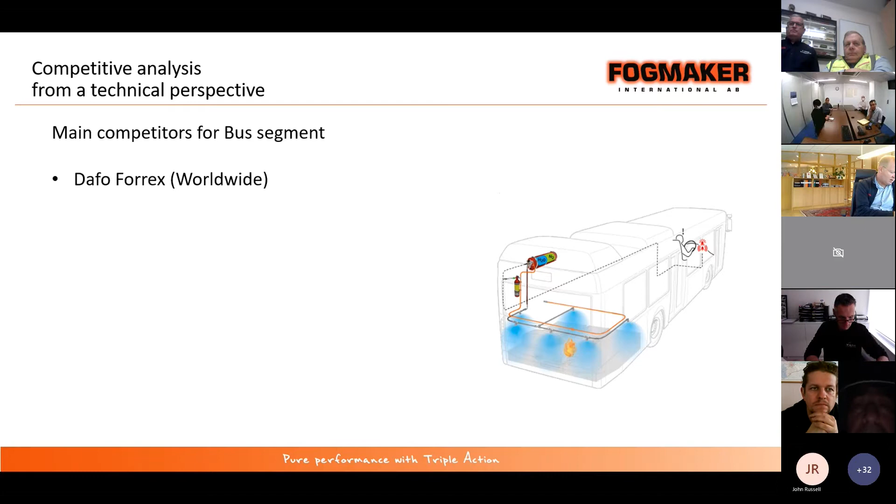In no particular order, Dafo is of course one of our main competitors for buses. They are spread worldwide, more or less. They can pop up basically anywhere. They follow their customers the same as we do, and they've been doing this for a long time, and they have a quite good reseller network as well.

We also have Rotarex, their compact line system. According to their website, there are resellers worldwide except for Africa, and we see them pop up now and then. Quite aggressive prices sometimes.

Third one, Kidde, with their dry chemical powder, mainly in North America, some in Europe as well, but I have not heard from any other parts of the world. Comment here: they are taking part mostly in the Melbourne area, but also in New South Wales in Australia since the banning of PFAS. Good input.

Australia, of course. And we see a lot of newcomers here, I think mainly because of the R107 regulations. We hear that Protecfire, Firedect, and some aerosol suppliers are popping up and are sometimes quite aggressive with low prices.

And we will go through these manufacturers' systems later on.

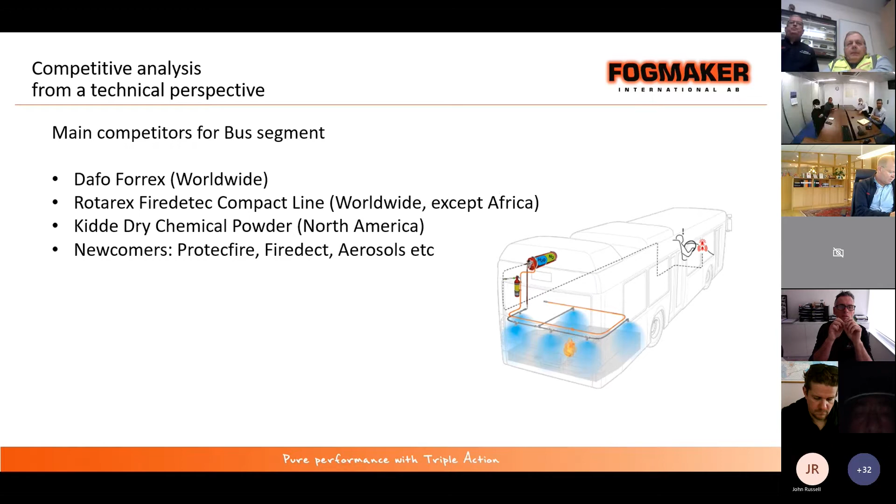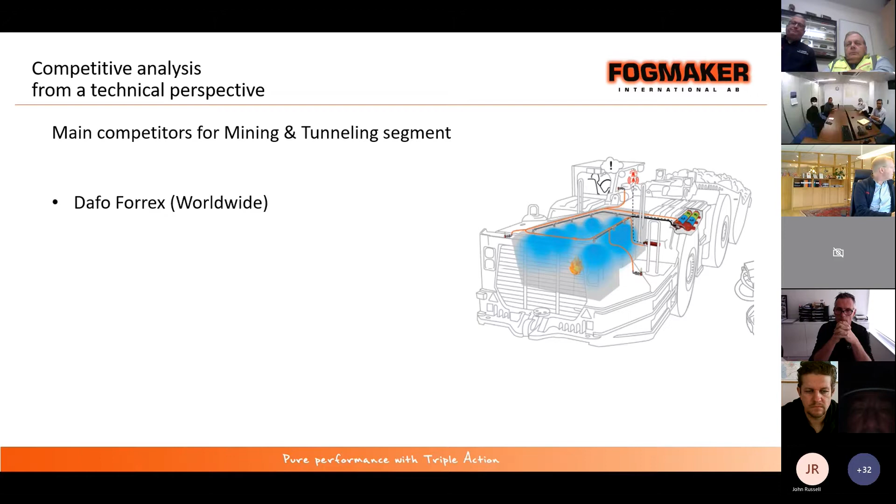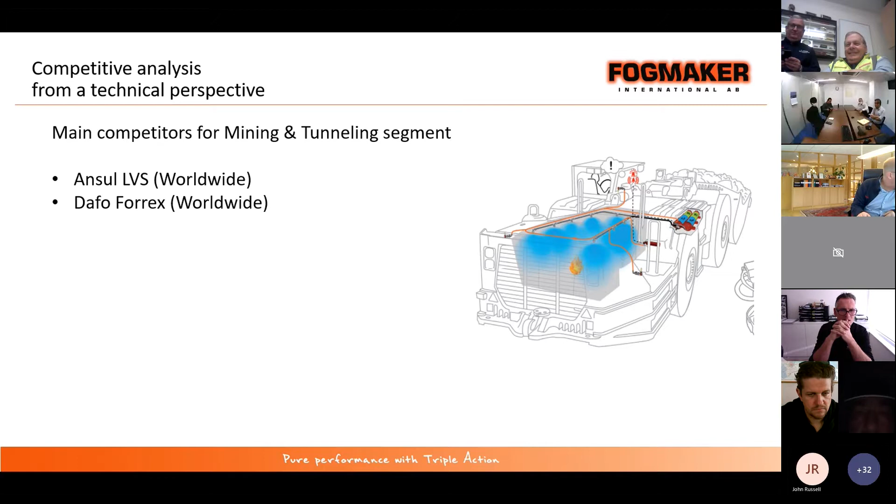And Kidde as well. They have their dry chemical powder, but they also have wet chemical, which might be increasing in the same way as Ansul. We don't know yet. I also put Sandvik on the list. They have their own system, which we bump into now and then. A foam system, liquid system.

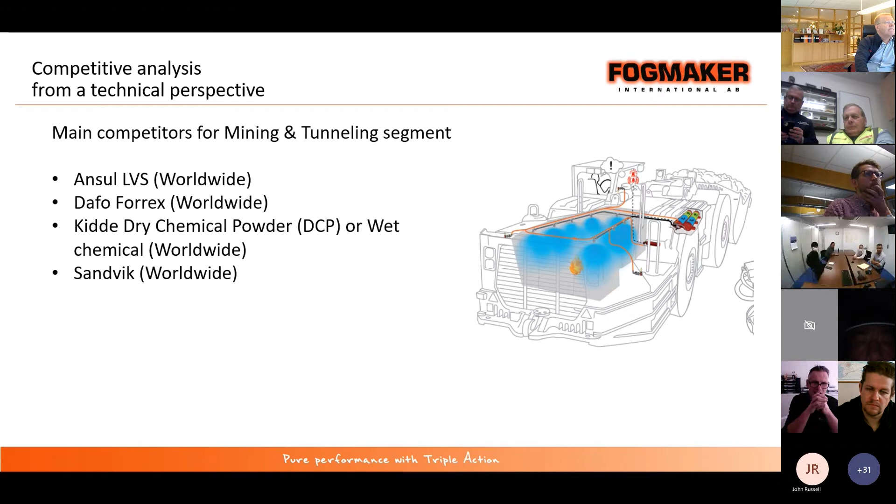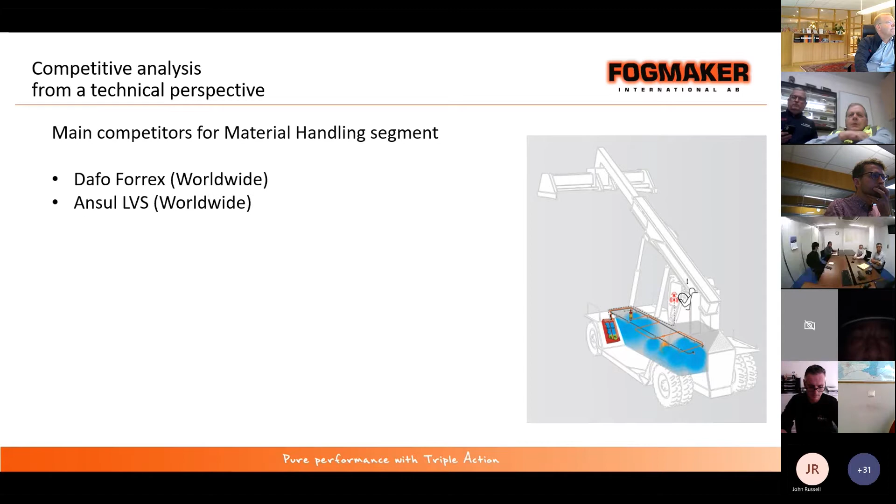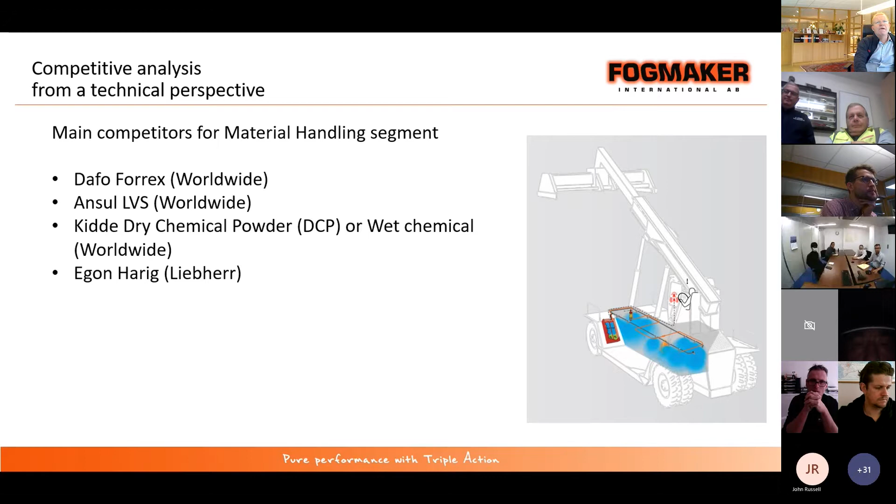Moving on to material handling: DAFO, of course, Ansul as well, and Kidde. So basically the same as mining and tunneling. We also have Egon Harig and Liebherr. They use aerosols, and I am not a fan of aerosols, but they do have a quite good detection system, which is interesting.

The last prioritized segment for us is trucks, and we don't see any competition here yet. It's a virgin market almost. We do see some DAFO for mining trucks in Sweden, but very little so far. We do know that there is work being done in the UN group for ADR, dangerous transport of dangerous goods, where they want to incorporate requirements for fire suppression systems on some classes of ADR trucks in the future.

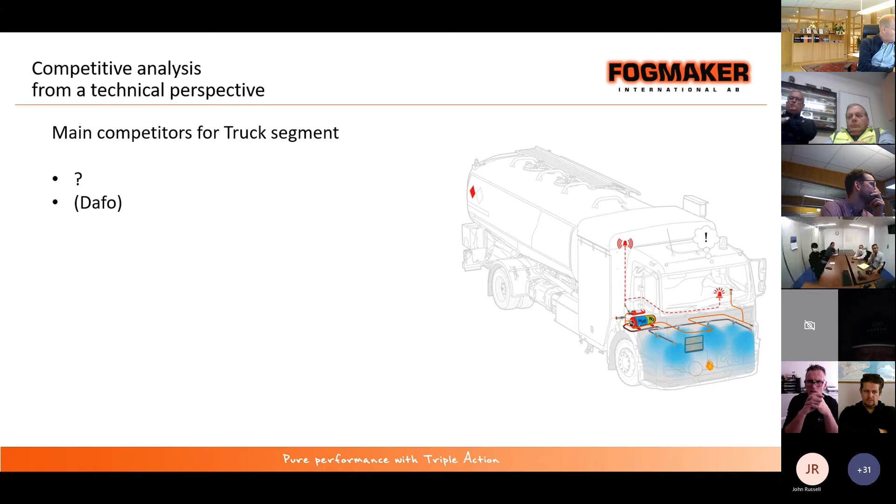The number of ADR trucks in Europe is almost the same as buses. It's interesting. We did an internal meeting with the key accounts and tried to guess the segment share, and this is the result for each segment we have. As you can see, DAFO at the top, Ansul second, Fogmaker third, sorry, and Kidde in fourth place.

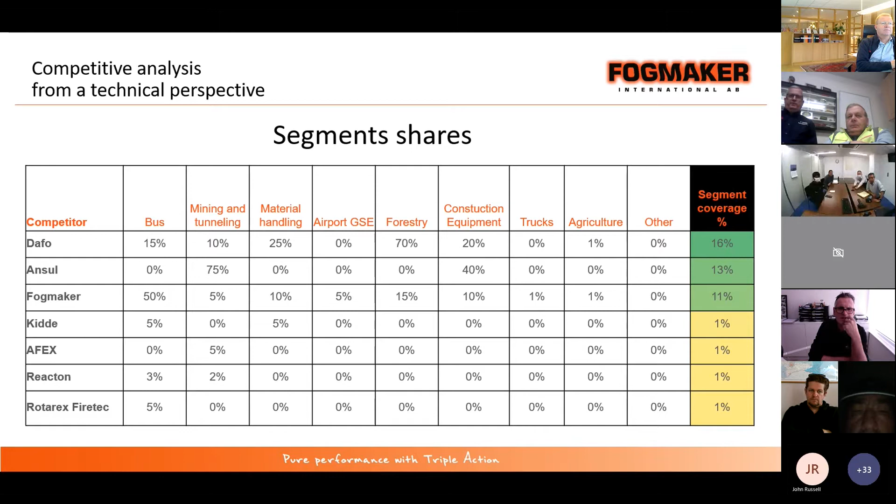Moving on to pros and cons with the main competitors, starting with DAFO, the Forrex system. You probably know this, most of you. The system uses a linear heat detection wire, melting cable, or a twisted wire. They use the liquid-based agent, the Dafo Forrex from Dafo Fomtec. They have sizes from 5 liters up to 25 liters, so bigger systems than we do. They also have a Novec solution now, available for smaller compartments, similar to FogMakers.

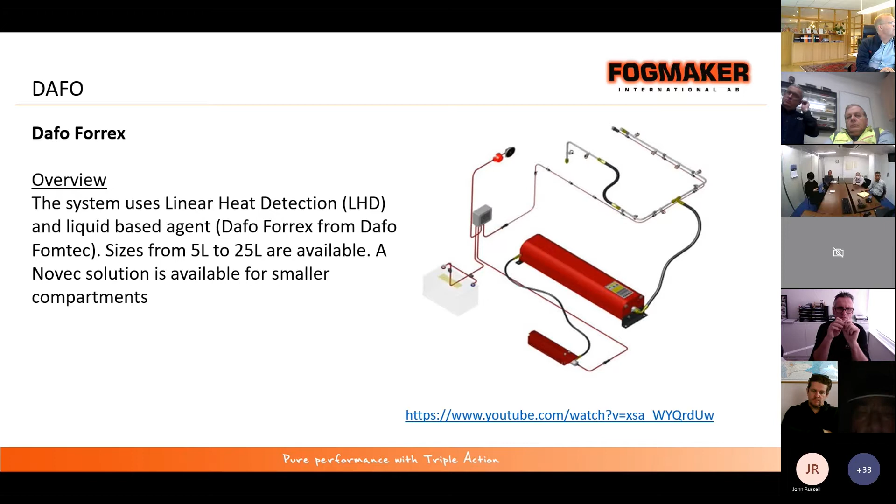How it works: the fire is detected. When the fire is detected, a Metron charge, same as FogMaker uses actually, electrically activates and punctures a membrane in the smaller gas bottle, which you see here. The gas is led through a hydraulic hose to the main agent tank, which is pressureless normally and will be pressurized when it needs to. The fluid is then discharged through the pipe system and the nozzles.

Normal emptying time we have seen is around 10 to 15 seconds, so they are generally faster to empty than FogMaker.

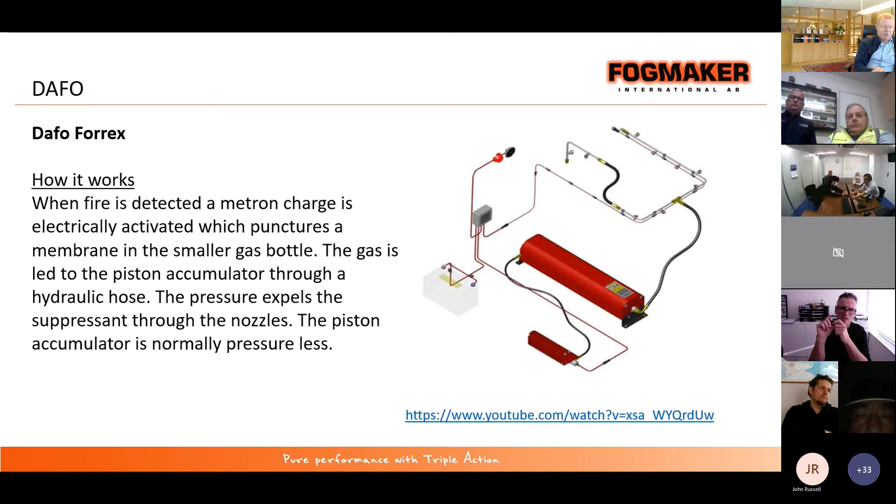Some pros and cons. The pros are basically input for FogMaker, what we can do better. And the cons is input for you, so you will have the tools or comments to discuss with the customer what is less good with the Dafo Forrex system, for example, compared to FogMaker.

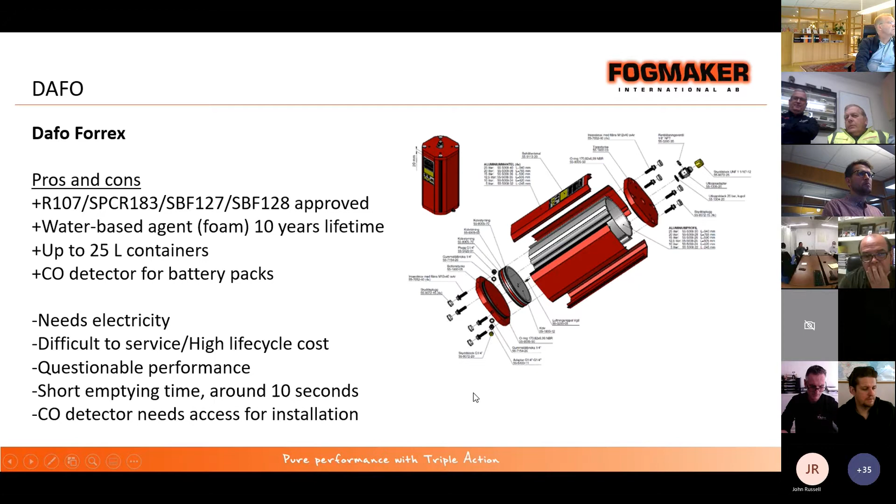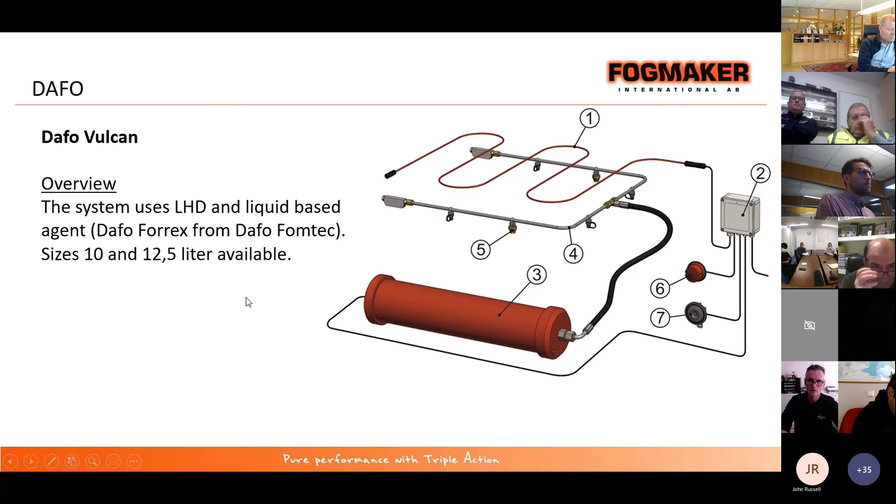Moving on to the next DAFO system, the DAFO Vulcan. Similar in some ways, different in others. They use the same detection, same liquid. As far as I know, they have sizes 10 liter and 12.5 liter available, but they could make different sizes as well.

The detection works the same way. When fire is detected, a gas generator in the bottom of the agent tank is activated - you can see it here - and this creates a pressure that drives the piston and ejects the liquid from the tank. Quite simple.

Pros and cons with this system: they have the approvals, same as the Forrex. Same liquid, 10-year lifetime. Low maintenance compared to the Forrex system. But the drawbacks - this is a one-shot system. Once it's activated, it's scrap, you need to replace it. The reason for this is the gases are quite aggressive, so it can damage the inside. Yeah, it's a one-shot system. Also needs electricity.

So moving on to Ansul, the Ansul LVS liquid system.

May I ask a question? This is Fausto from Ofira. Can you go back to the DAFO slide, please? Do you have the impression that Vulcan will replace the previous technology? Because Vulcan is the recent technology, correct?

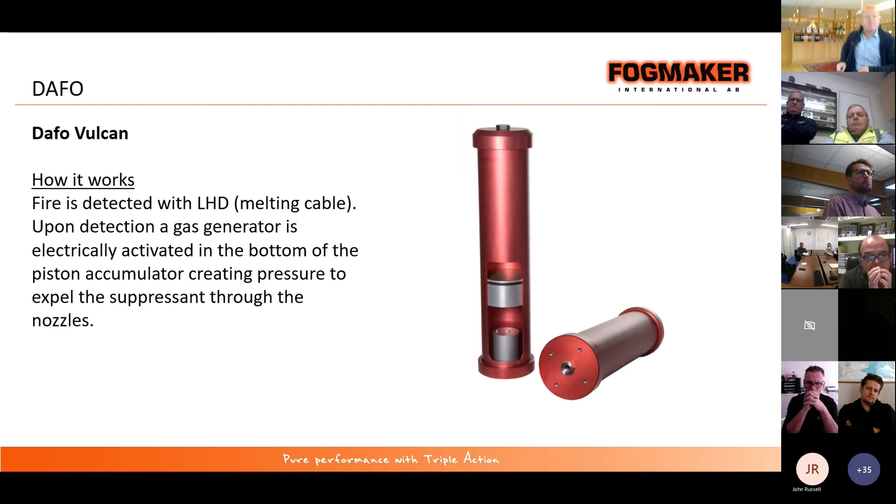Because if you have to replace this complete system and it costs 2,000 euro, at this point the total cost of ownership - comparing replacement of one brand new system after 10 years versus making a 5-year revision of a FogMaker system - is much cheaper to follow our procedure.

Even considering that inspecting our system after 5 years, you have the opportunity to remove any defects generated during service or during the original installation. So you have a double check. This is something that needs to be clearly analyzed during the life of the system.

And I have asked several transit authorities, even here in Verona - Verona has MAN buses with Vulcan - and we have asked them to put pressure on DAFO to understand what is necessary to do after 10 years, because this is the missing information that allows us to understand how sustainable this product is in terms of maintenance and service.

Good point, and we will try to get more info about this. The life cycle cost, especially, is very interesting.

Carl has an additional question relating to Vulcan. He asks, regarding the DAFO Vulcan, does their own official information manual state that the cylinder needs exchange after deployment? I'm 99% sure that it does, but we need to look at it.

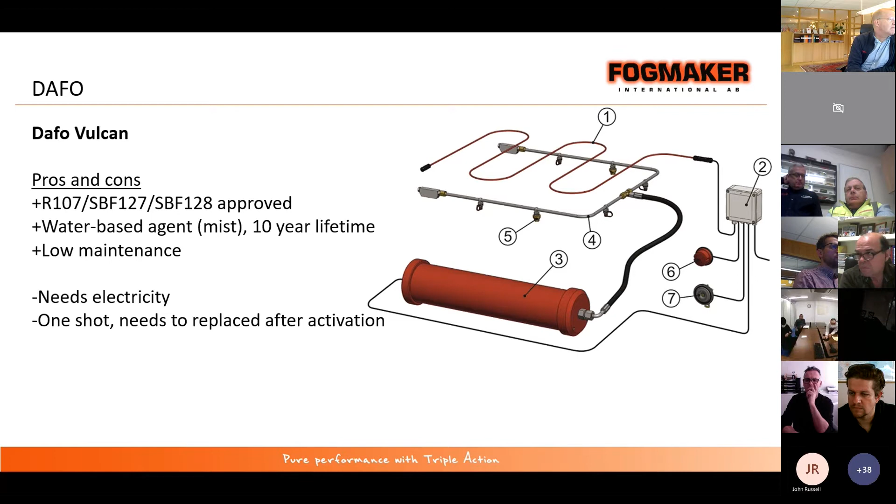Thank you, Fausto, it's noted. So I will continue with the Ansul system.

As I mentioned, they are phasing out the powder system for vehicles, recommending only the liquid agent one. The info I found is they have 3 sizes: 19 liters with 4 nozzles and 30 second emptying time, and 57 and 114 liters with 10 and 20 nozzles with 60 second emptying time. So quite big systems.

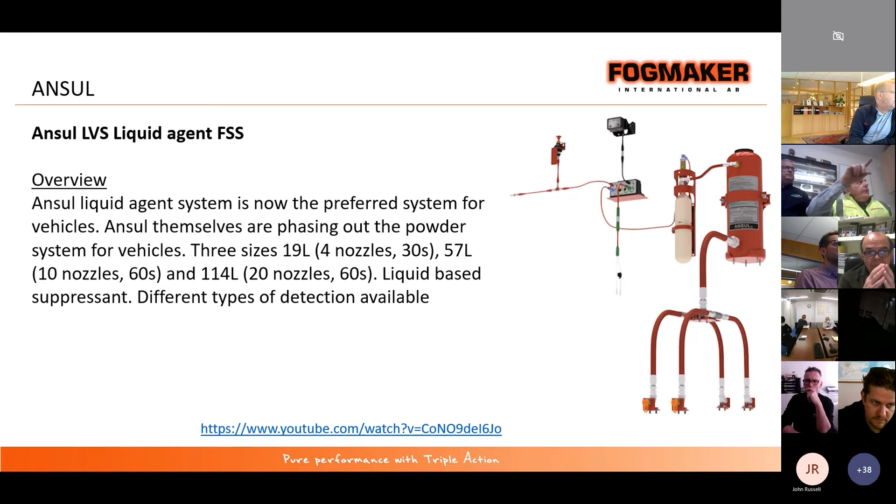They do have different types of detection available. I think linear heat detection is the standard one, and it works on the same principle as DAFO mainly. But since they have high flow, low pressure, the number of nozzles is limited and requires proper installation. They can't add nozzles because it affects the flow of the remaining nozzles. It's also position dependent - you can't mount it upside down or lying, otherwise you'll only get the nitrogen out.

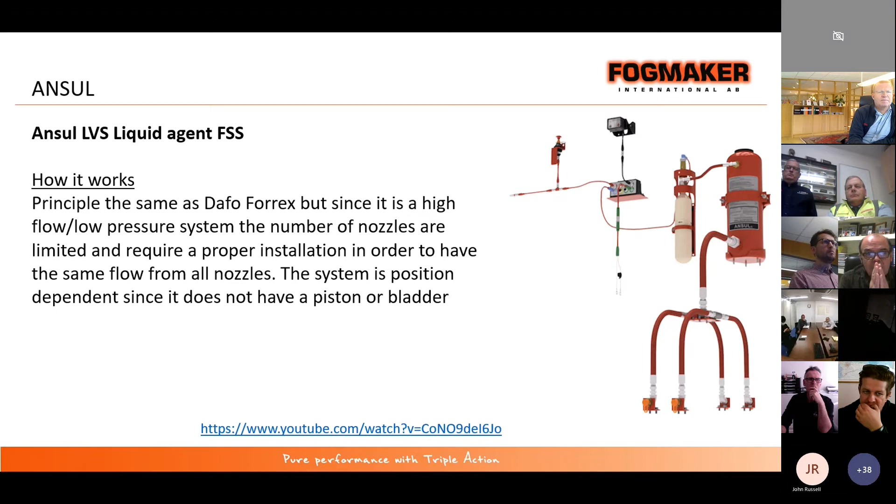The drawbacks: they need electricity to work, they are very heavy, and they don't have an R107 approval. The main segment for these is yellow machines, mining and tunneling, or material handling.

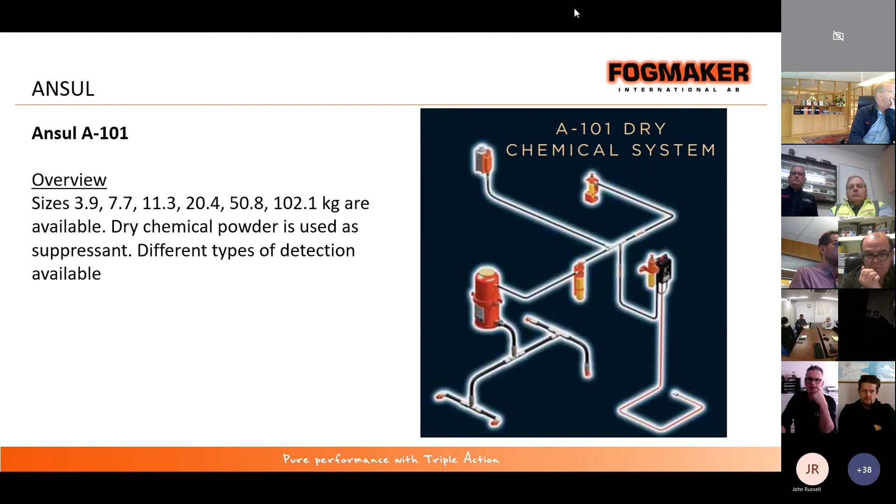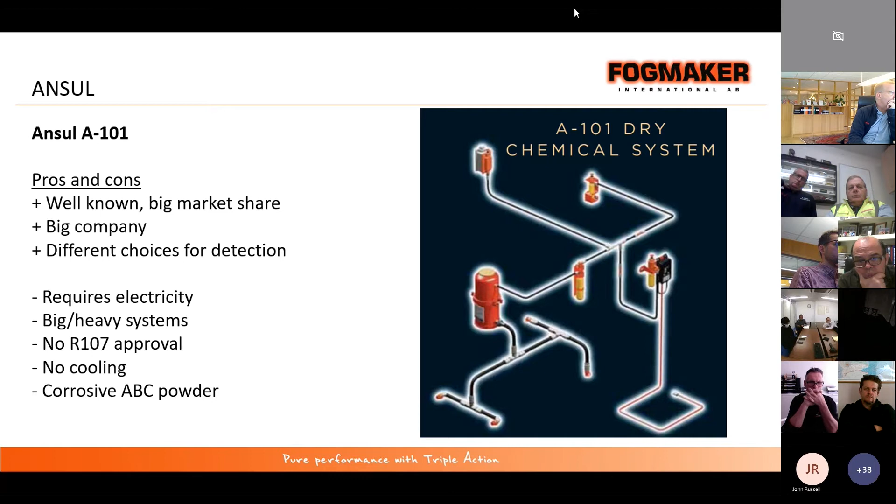They do have their old powder system as well - we have DAFO, skip through this. It works basically the same but using powder instead. One thing good to know is they use ABC powder, which is corrosive, especially in Sweden.

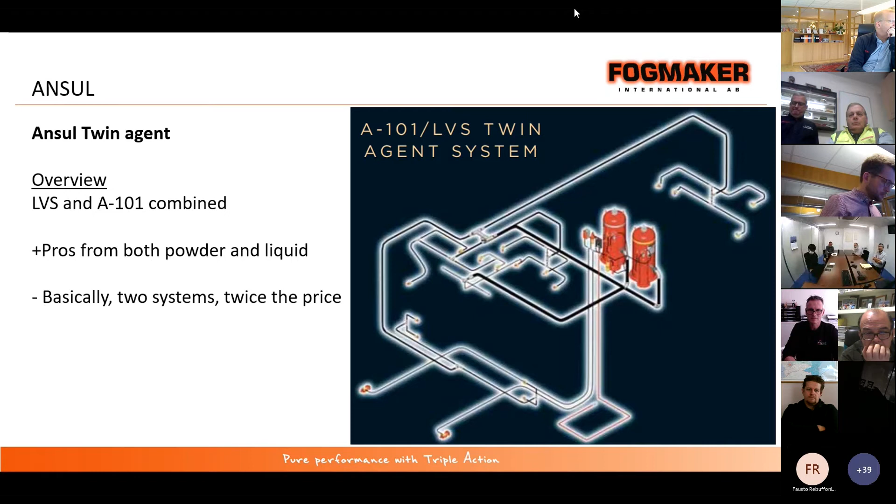Their third system is the twin agent system, which is basically the powder system and liquid system combined. So you get the pros from both powder and liquid, but you also get twice the price. Basically it's two systems - it can be overkill. This is used on big machines, open pit vehicles, for example.

Gustav, can I pose a question? Of course. I shared the extract out of the AS 5062 from a comment.

I forget the gentleman's name, but he was a product manager for Tyco, stating they are not promoting - as close as possible to that word - the dry powder system anymore. Is that a fair comment from this guy? Is that what they're going to do - basically stop promoting the DCP system?

Kidde, they are very secretive - very little information on their website, but they do have the dry chemical powder system, of course, with linear heat detection, UV detection, and other types of detection as well. It works basically the same as DAFO and Ansul. They activate the DCP container electrically when they have a detection.

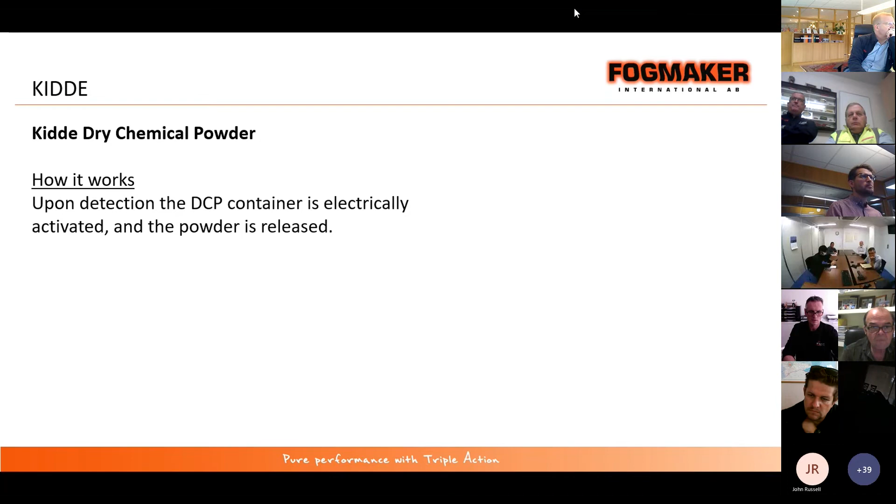Pros and cons: they have P-mark approval, R107, AS5062, for example. The powder has - all powder systems usually have - a good knockdown effect. But the drawback is that they don't cool anything, so there is always a risk of re-ignition. They have advanced detection, and it's a big company with big resources.

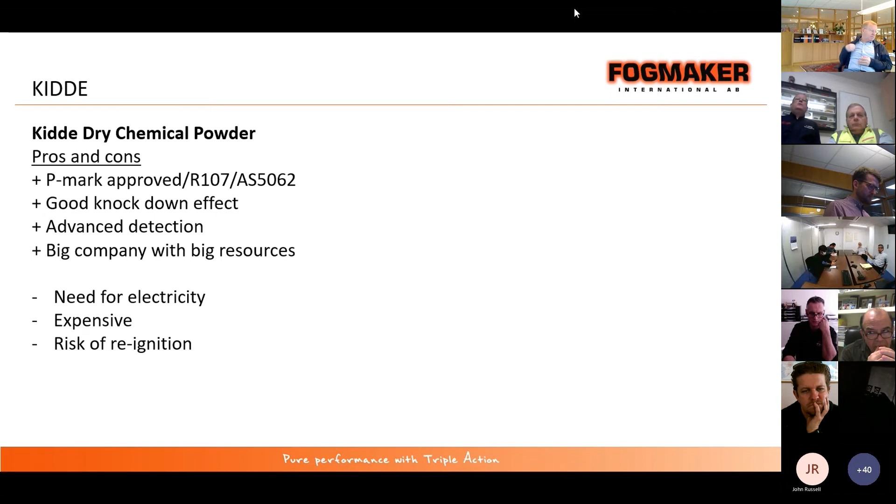Drawbacks are basically the same: need for electricity, quite expensive, mainly because of their detection I'm guessing. The components for the powder container aren't expensive, but the detection can be. And the risk of reignition, of course.

The wet chemical system has the same types of detection available. They use the AquaGreen XT, which contains PFAS chemicals - if they haven't done anything lately about this. It's a liquid containing salts similar to the FogMaker -35 liquid. And it looks like this one is coming back, which is interesting.

Works the same as the powder system, electrically activated, and the liquid is released.

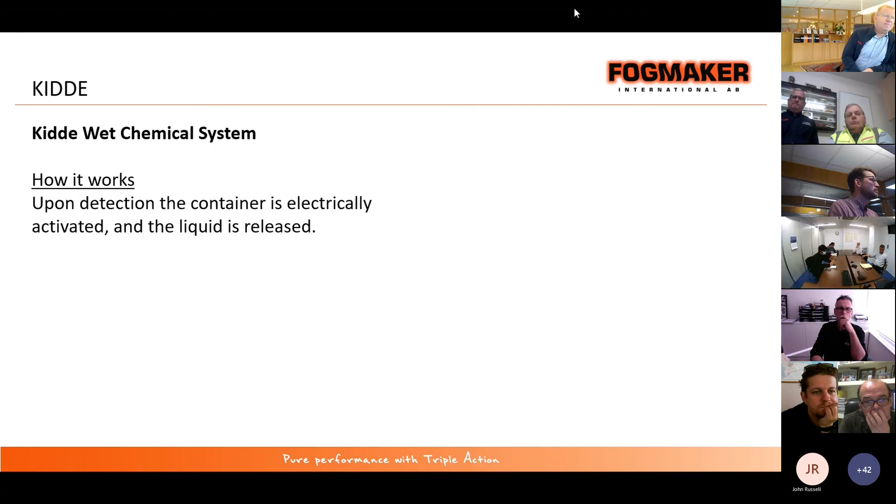We don't have any information about deployment time. No.

It's very difficult to find information on their website on data like that. But we know they have P-mark approval, advanced detection, big company. They don't seem to have a fluorine-free agent available, which is

quite surprising for that type of big company. Yeah, but just adding here, this is Kidde Aerospace and it's for the military, so they're not so sensitive. But then they have Kidde Sentinel, which we have been kicking out from Harsco, but they are more or less pulling out from the civil side, and that might be one of the reasons.

But you should highlight here they got dual spec or triple spec IR detection, which is from the military, which they have as an advantage in some US market. Yeah, good input.

Moving on to Rotarex, the compact line system. This system can use either loss of pressure detection as we do, or linear heat detection. They use liquid, Temper S-55, or Berkicold as a zero-degree agent. Sizes 4, 7, and 12 liter is available. They do have a wireless alarm panel for faster installation when doing retrofits.

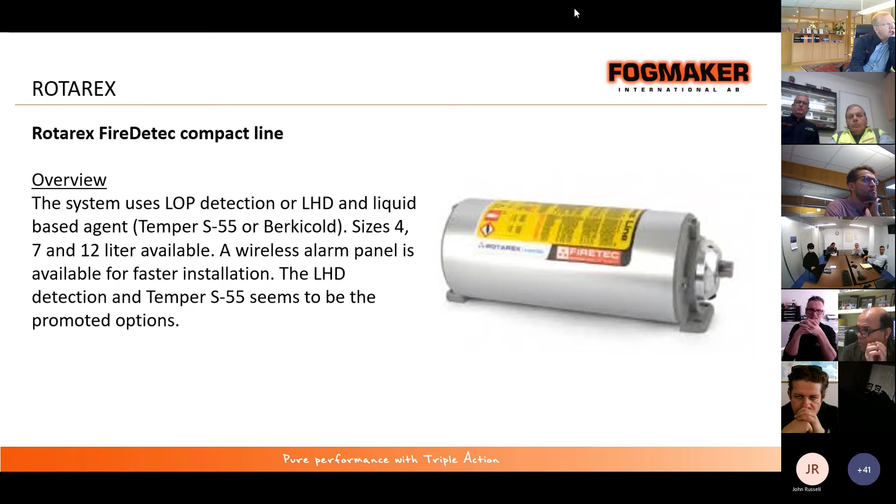And the linear heat detection and Temper S-55 seems to be the promoted options. I know they had or have had problems with the loss of pressure detection, and there are also higher service demands on that one.

So how it works, it's a bit similar to FogMaker. When using loss of pressure, they use a detection tube, same as we, that bursts, and the pressure loss activates or opens a passage from this internal chamber, which is the nitrogen cylinder, 200 bars of pressure.

And this is released through a pressure regulator to this chamber. You have a piston here. So the gas comes over on this side, moves the piston, pushing out the liquid. And because of the regulator, it's a fixed pressure at 35 bar.

And they also have a second regulator to draw pressure from the nitrogen tank to the loss of pressure tube. And when the linear heat detection is used, they use electricity to activate the system.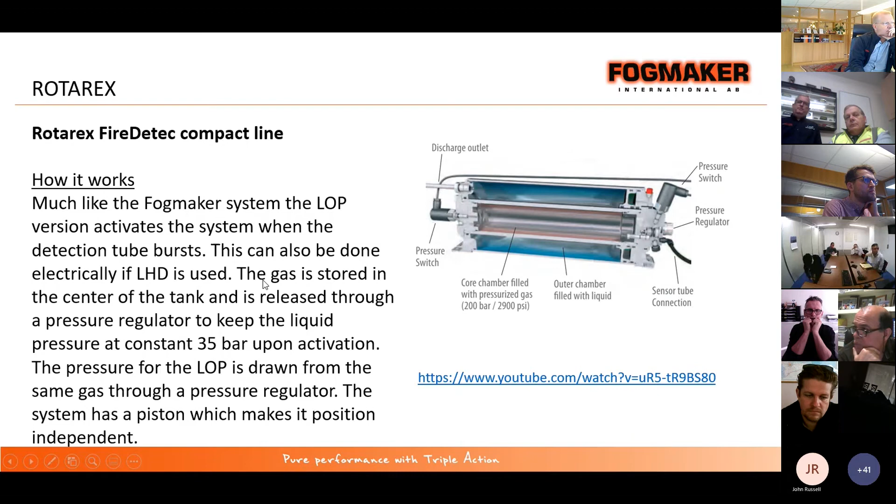So pros and cons: compact design, only one container. They don't need electricity if they use loss of pressure, but they don't seem to promote it for some reason. They do have the wireless alarm panel. Good R107 performance, 4 liters, but 14 nozzles.

They use fluorine-free agent. Temper S is not containing any PFAS chemicals. And temperature range from -30 to 80 Celsius degrees.

The drawbacks: they are expensive, but we've seen that they can be very price aggressive as well, almost giving the system away to get market shares. The design is quite complicated. You have a lot of things that could go wrong, or leak or something like that.

If they are using loss of pressure or detector tube, the tube needs to be changed every 4 years. They use a polyamide tube, which will be affected by ozone and heat, and it ages.

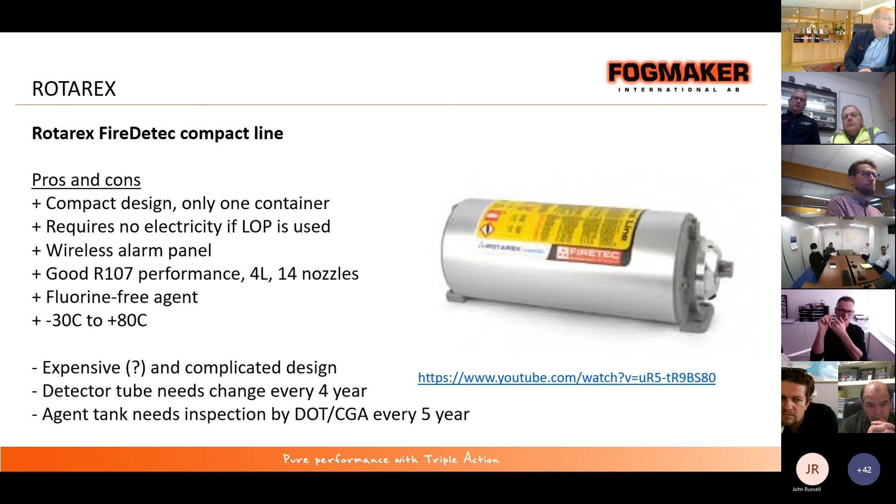So moving on to some upcoming competitors, and this is basically systems that we hear a lot of, but we don't see as much of on the market. But who knows, in the future there might be more of it.

So we have Protecfire, their system Detexline, 4V for road vehicles or 4MC for off-road vehicles. The only difference, as far as I can see, is a manual actuator for the 4MC system. This system uses a heat-sensitive spot sensor, which you see here, and a liquid-based agent, sizes 4, 7, 14, and 24 liters available. I'm not sure if the 24 is still available, but these should be.

They also do systems for kitchens, wind power, electric cabinets, and others, using the Novec system in that case.

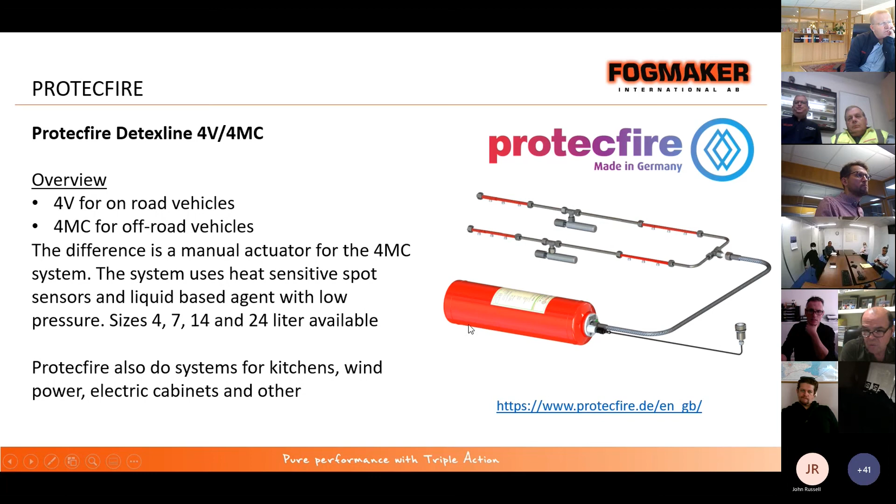So how it works - it's quite an interesting design. The spot sensors are heat sensitive, they have a glass bulb, and when this glass bulb breaks because of heat, it releases a small gas cartridge into the distribution system. So you have the detector here, it detects a fire, it breaks, opens a pressure or gas cartridge, and releases the gas into the pipe system, going back to the cylinder. When it reaches the cylinder, it breaks a membrane of some kind, and the passage to the liquid is opened, and the liquid will come the same way out through the nozzles.

They use liquid, either Tiborex Absolute, which is fluorine-free, or they used to use Mousseal from Sthamer. I don't think they use this anymore since it contains fluoride.

They use a stainless steel tank with a bladder inside, so it's a position-independent system. The pressure upon release is 20 bar, so not very high. The component you see here is the bladder - it's screwed in from this side and expands outwards to push out the liquid.

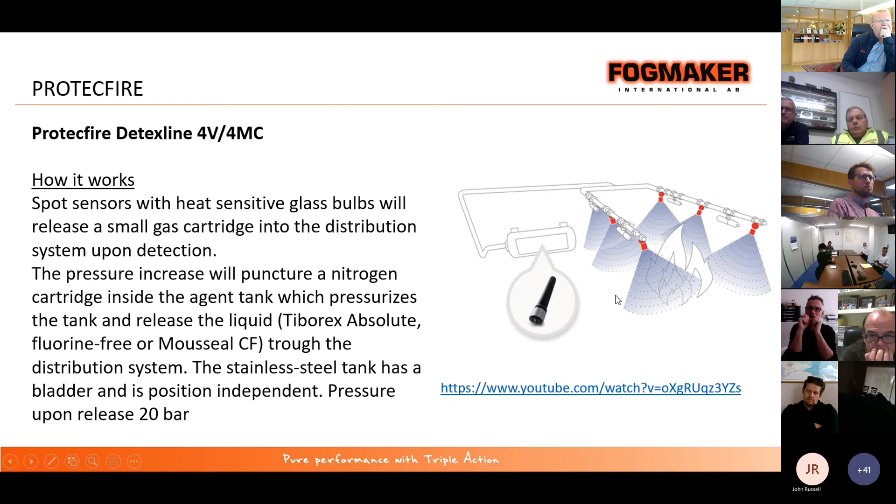So, pros and cons for this system. They don't need electricity. It's position independent, same as FogMaker. Quite good R107 results, 5 liters, but they used 17 nozzles, of which 9 nozzles were flat. So it looks like they were trying to pass the test without thinking of the real deal. I don't see any reason to put flat nozzles inside a bus engine compartment, for example - it's to go between the pipes. Exactly, yeah, to pass the tests and nothing more.

They have a fluorine-free agent. They claim themselves that it is easy to install, 3 hours for a bus. Temperature range from -30 to +80. Quite compact design, only one container.

But then the drawbacks - they use spot sensors, and it's very difficult to cover an engine compartment where you have airflow, for example, and lots of different components, to cover those with spot sensors. You can get a fire over here, and this won't detect it if you have an airflow coming that way.

This is also a one-shot system. When it's activated, it needs to be replaced, and also after 10 years, the whole system is to be scrapped and replaced. So the life cycle cost for a bus, for example, that might be rolling for 20 years, is high.

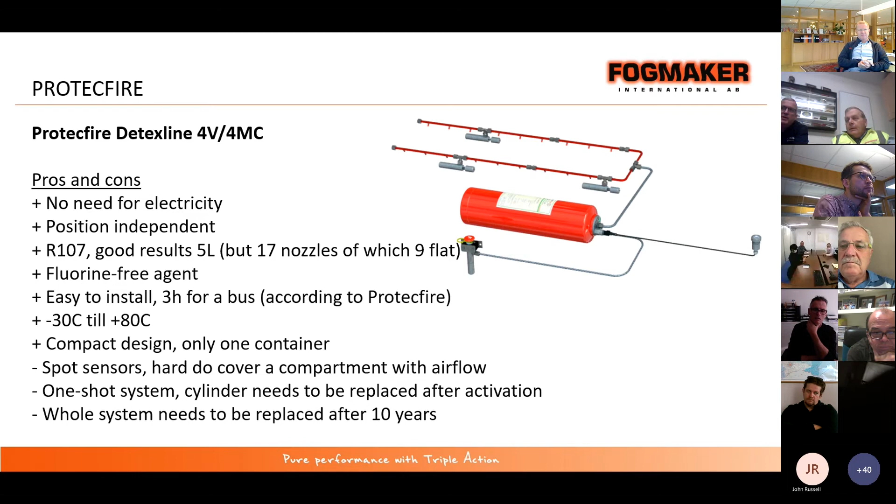So that's the Protecfire.

Another newcomer is Ultrafog - quite an interesting system. They popped up a couple of months ago, I think. Fausto from Ofira tipped us off on this system.

They use loss of pressure, liquid-based agent, 110 bar pressure, very similar to FogMaker. They have sizes 9.8 and 15 liter available at the moment. This is a system aimed for vehicles, mainly buses, also machines and trains. It's very obvious that they have taken a lot of inspiration from FogMaker and some from DAFO as well.

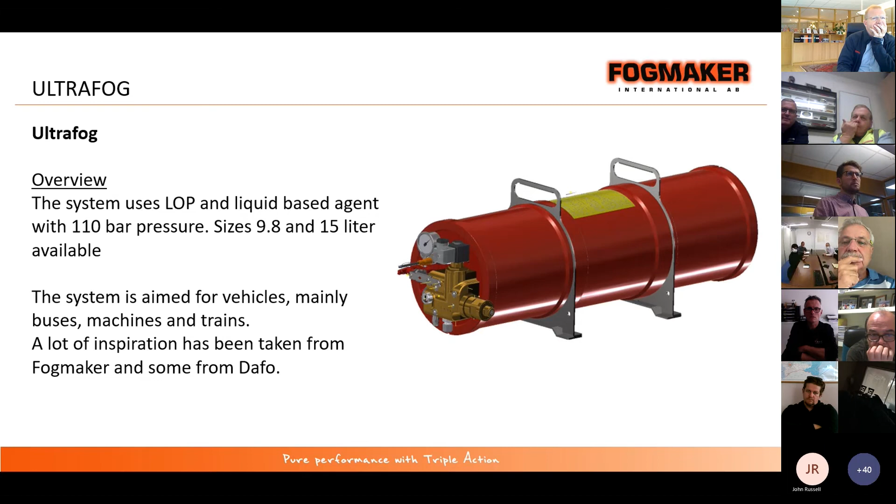So how it works - it's basically the same as FogMaker, or almost exactly the same. A piston inside, gas on one side, liquid on the other, loss of pressure, and also possibility for manual or electrical actuation.

The pros, same as FogMaker - no need for electricity. They are R107 approved, I haven't been able to find the certificate to check how many liters and how many nozzles they needed, but I'm looking. They use Temper -30, which is fluorine free, or water, which is of course also fluorine free. Quite compact design, only one container.

And this is one of the drawbacks, actually - they pressurize the detector tube from the piston accumulator with some type of regulator, and since they seem to be using liquid in the detector tube, this can cause trouble if you have high differences in ambient temperature. There is a risk that the tube will increase in pressure and eventually burst. But I'm not sure if they have a solution for this, but it's interesting.

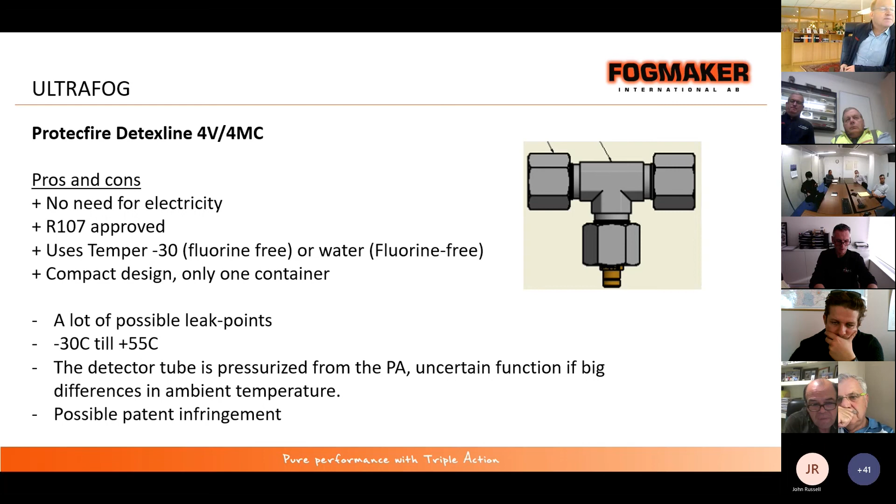Thank you. So moving on to Firedect.

Also a quite different system compared to the others. They also use spot sensors for fire detection, but they could also use other types - linear heat detection or smoke detectors and so on. They use a liquid-based agent, and they have a separate nitrogen bottle with a regulator. And the only size I found is 7 liter.

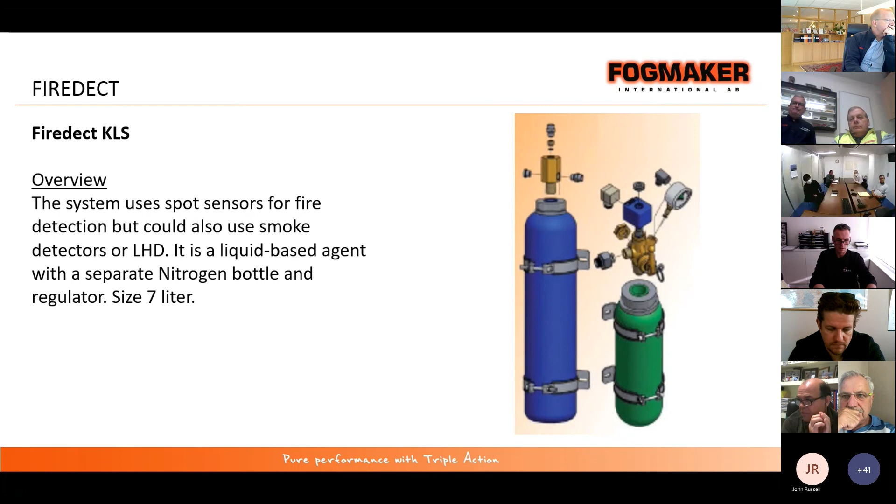Works basically the same as FogMaker, but with linear heat detection then. I don't think it should say FogMaker here - it should probably say DAFO.

See, all this picture is wrong, I have to correct this one. So don't mind the text. They have the nitrogen bottle, which activates electrically when they get a fire detected. The nitrogen is released through the regulator to the water tank or agent tank, pressurizing it, and the liquid goes out through the distribution system. Won't be a lot of pressure. I haven't found which type of pressures they use, but I don't think this one is probably a high pressure cylinder. Since they use a regulator, I'm guessing maybe 30 bars or something.